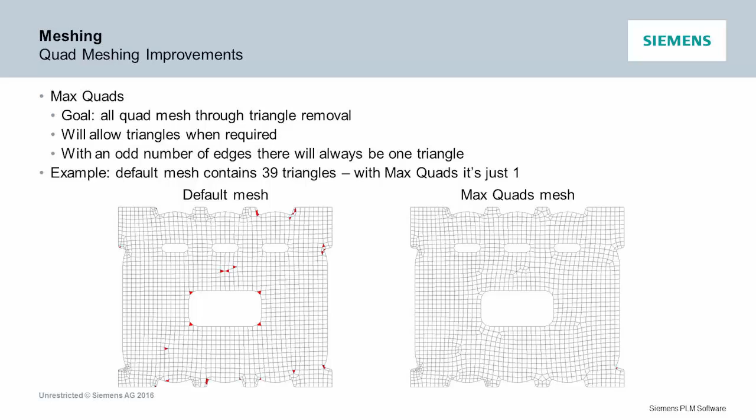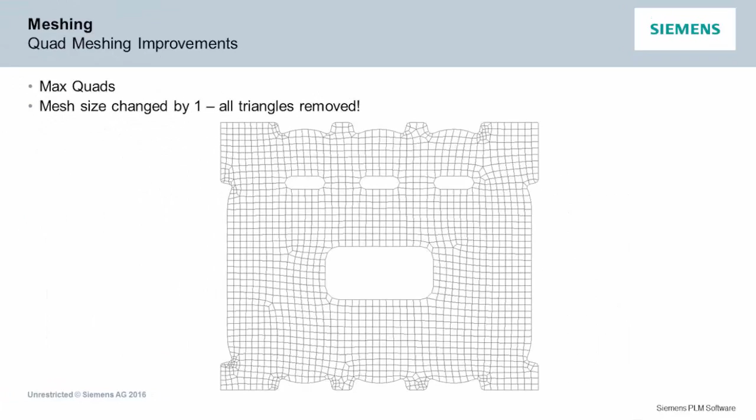So here's the default mesh, and if you don't turn on max quads, this is what you still get. You turn on max quads, it just takes those triangles out, and since there's an odd number on the periphery here, you have to have at least one triangle. But if you change that to one mesh size, you can get an all quad mesh. So if you want an all quad mesh now, you can get one.

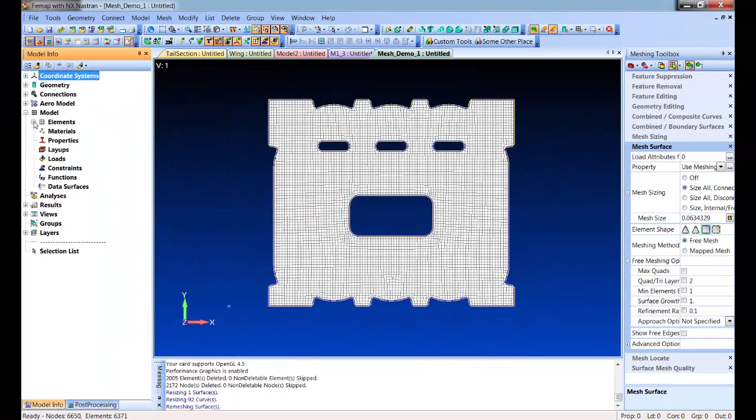So here's that exact same part, and I'll do mesh surface. I'm not going to let it just remesh and resize right now, but here's the default mesh. And if I go under elements by shape, I can turn on the highlighter and see there's 8 triangles in there. All you got to do is turn on max quads, pick it again, and now there's 4 triangles. Now, it still honors the maximum aspect ratio. So as long as you tune that up a little bit, you can then go to no triangles at all.

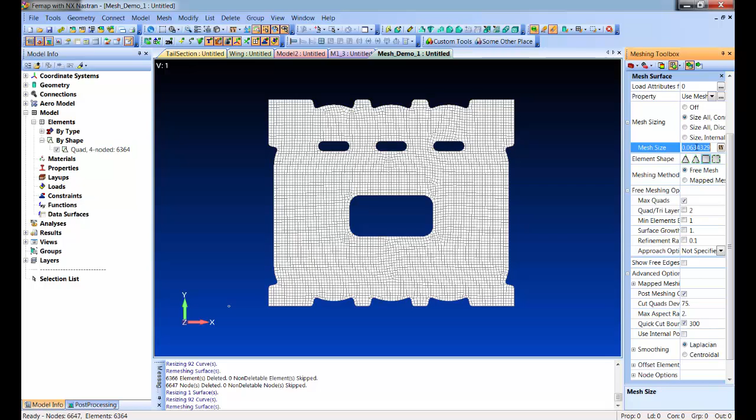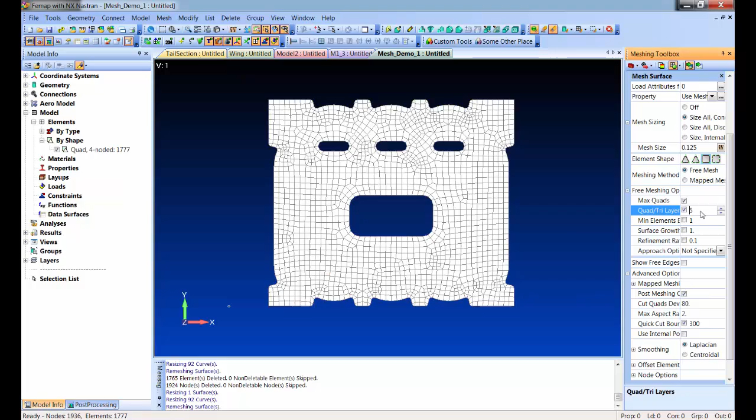And if you change the mesh size, let's just see what it does here. A couple triangles. But again, those are along the same thing. If you allow it to get a little looser on what it'll take as a quad, you can get all quads. Now you can combine this with the layers and get a real nice layer around the edges and then an all quad mesh. And if you keep juicing up the layers, you can do some other fun things where you run the layering in a little bit more. But you can get just about any mesh you want. They're all quads if you want them now.

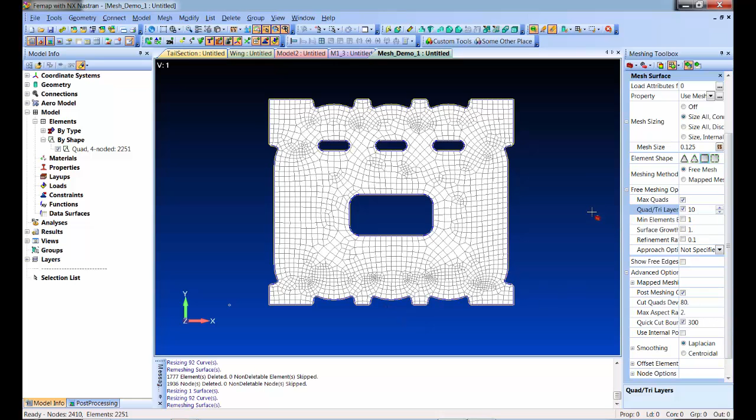The layers actually tells the mesher to pave one almost perfect layer around the edge. And I told it now 10, so it keeps trying to pave in. Once it gets close to something, it stops. And then anything left over gets the free mesh.

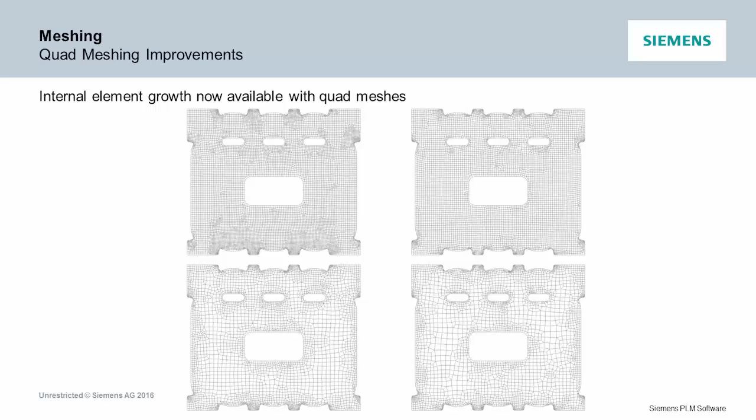Another thing we did: our triangle mesher always had a great growth thing, so when you're tet meshing something, you could tell it you want a tight mesh around any boundaries or periphery, and then let the mesh grow out towards the middle where there's no stress concentrations anyway. The quad mesher didn't do that. The quad mesher was kind of constant across the mesh, it wouldn't grow in the middle. We've now turned on the grow in the middle for the quad, so you can now achieve that same effect where you tighten up a lot around stress concentrations and such, but let the mesh grow further out and get your node, degree of freedom count down for the model. That'll help get models smaller and get better answers.

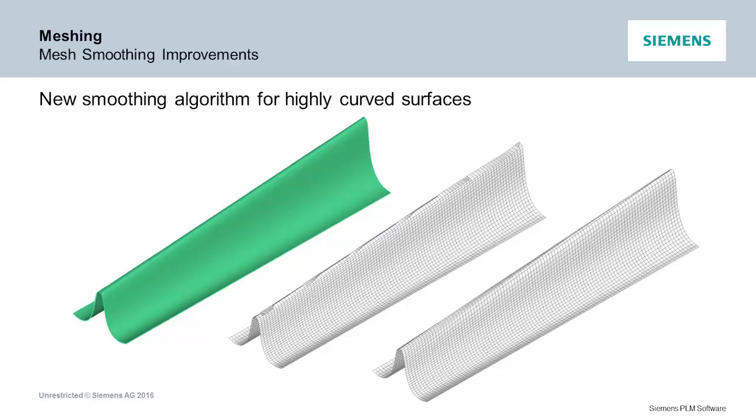We've also come up with a new smoothing algorithm. Our old smoother does a great job if your geometry and mesh isn't super curved. But where it was curved, sometimes the smoothing would cause it to relax, like a relaxation thing, so it would kind of droop. We recoded that with a new, more 3D algorithm, so you now get better smoothing of meshes on highly curved structures.

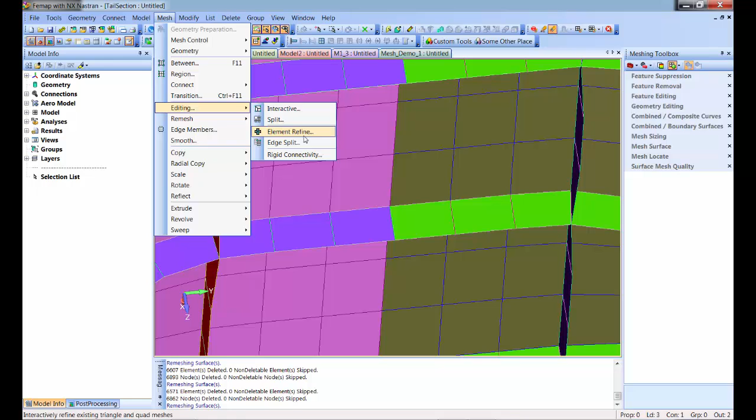So let's say you're given this mesh, there's no geometry, and for some reason you want to model some stress concentration here and maybe get some better stress data. It'll be a lot of work to make this happen with regular manual meshing or whatever. So George wrote the editing element refine tool. It's as easy as picking a couple elements, and this is a preview, it's not doing it yet. You can grow that selection, and when you're done growing that, you hit OK, and you've got a refined mesh.

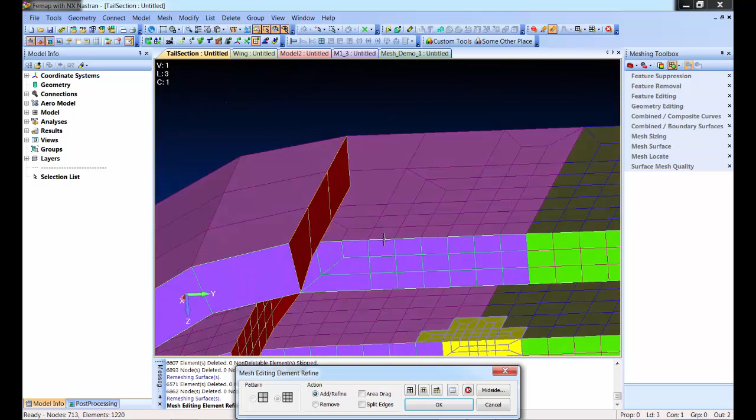I'll do it again. I think I picked one down on the inside. It's got to add and remove too. So if you didn't like what you picked, I can remove like that one, and I can now grow it.

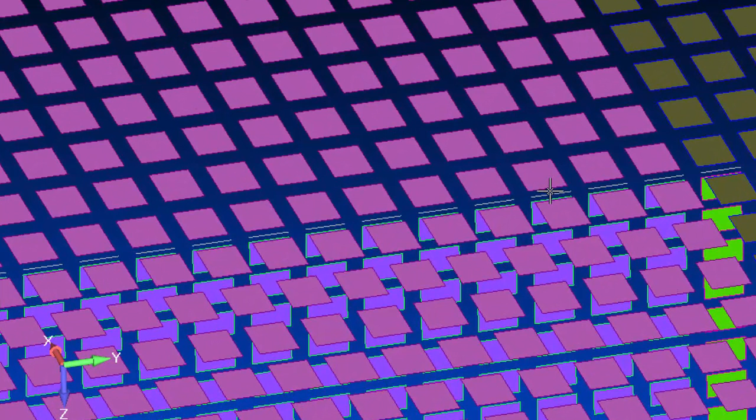Now the real neat thing that you don't know is going on here, I'll show you when I turn on the shrink. There were beam little stiffeners around this model. It's splitting every stiffener, it's propagating pressure loads, it's propagating, like if you had a laminate definition, the material angle for the split elements matches the one that was the original element. Constraints, if there was a constraint between the two nodes and they're the same, it would put a new one in the middle node. So you can now pretty much refine meshes instantaneously.

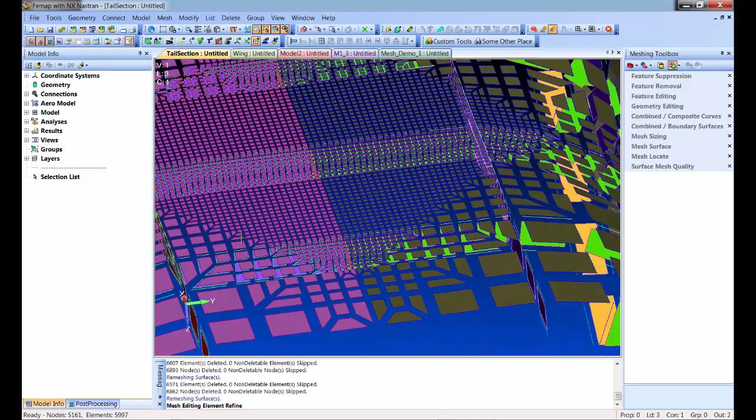I just want to make sure everyone's seen it - back in 11.2 we had another one that's also just handy. Under that same place there's a mesh editing edge split, and you can just pick two nodes, and it runs through the model and does the same thing. It propagates as far as it has to in order to keep everything connected. So you can pretty quickly refine a mesh with these tools.

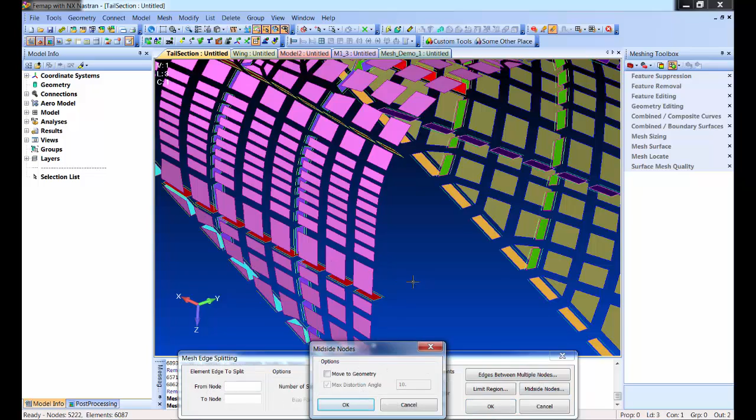In version 11.3 we added a multi-pick too. So if you were kind of doing that with multiple nodes, you can now pick multiple, and it'll go through and do them at one time. This does the same thing - splits the beam properties, pressures, constraints, anything. Just another quick example, T-junctions - whatever's connected is going to stay connected. It gets it all done.

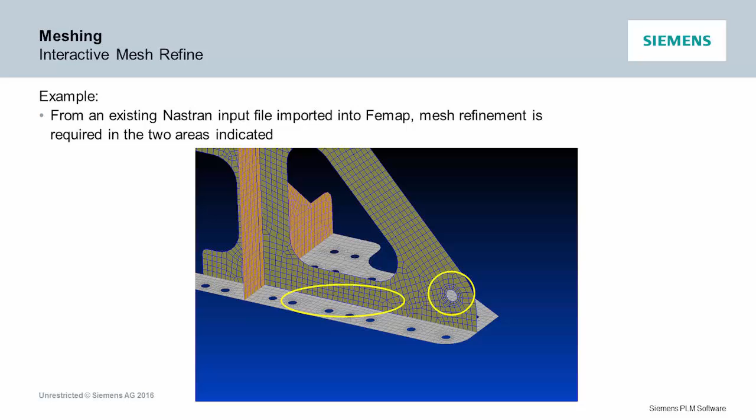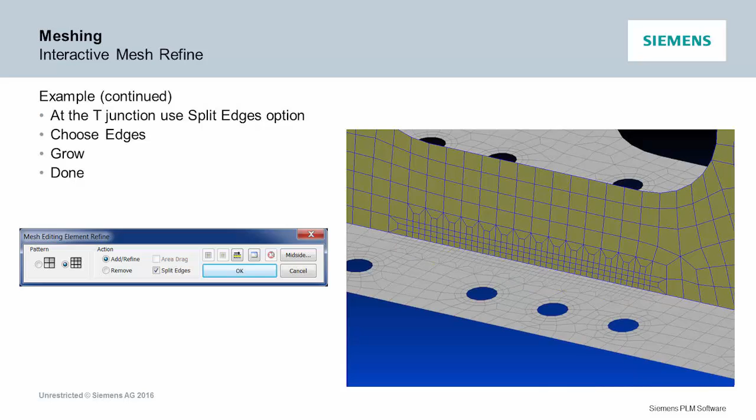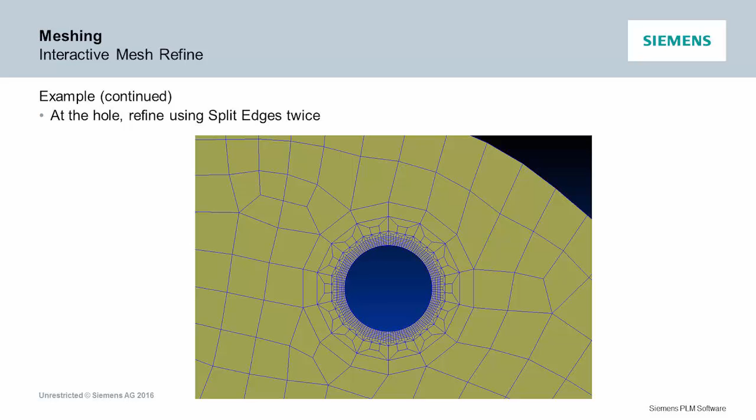In the same model, similar to the plane model there, you pick a region and grow it out wherever you want to. There's also just a drag - you can swing the mouse around and highlight elements and refine. If there is geometry, it will project and keep everything smooth; if it's just an orphan mesh, it doesn't do any projecting or anything. So you can quickly do some really nice mesh refinements.

Another enhancement we did in this release - we've always had these mesh hard points in the surface. So this part originally, it's a mid-surface thing, and it had some holes. We turned the holes into points so that the mesh would get a node right where you need to constrain it, and if you meshed it, you got a node everywhere you had a point.

We had an issue though - if you used our meshing toolbox to split this up and do other things to get a better mesh in certain areas, those hard points, sometimes you'd split a surface in half, and the point that was pointing to one surface is now pointing to a different surface. Now if you make any edits and stuff, the points automatically get reassociated to the new stuff, and when you remesh, your hard points are still going to be there. It's just much better when you're using that tool.

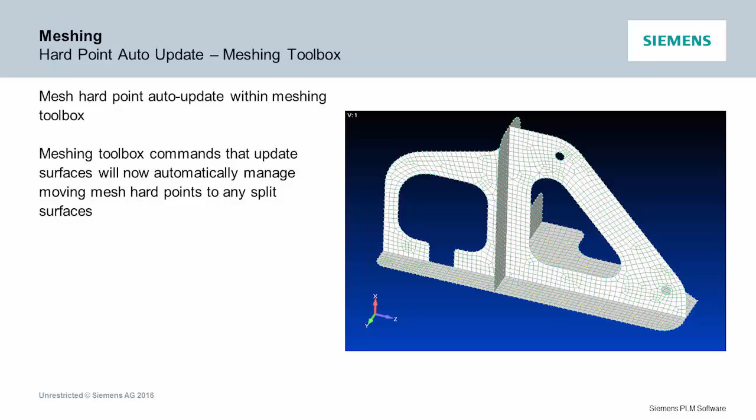Another thing we've been working on in Femap - we added kind of virtual geometry or topology on top of solids. A lot of times we get these parts in that have extraneous points and stuff, and sometimes even extraneous little sliver surfaces, which when we go to mesh, we take every little piece into account, we mesh those, and sometimes you get little sliver elements. We had tools in Femap where you could combine them together into a virtual surface and mesh on top of that, and you get a much better mesh. So it gets rid of all the little gaps and slivers.

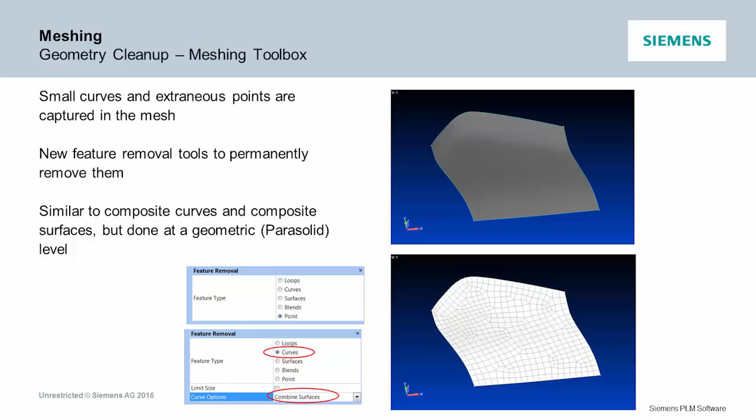But it really wasn't fixing the geometry. So for another customer, we now can actually take those points out permanently at a Parasolid level and clean up the geometry and take out edges so you get a continuous new surface. The nice thing here is it does the same end result at meshing, but at least now you get a nice single piece of consistent geometry. You could use it for other splits in Femap, or you could kick it out to another program if you needed to use it for something else. But if you're running into dirty geometry like this, it's just another tool in your toolbox to clean that stuff up and make really good meshes.